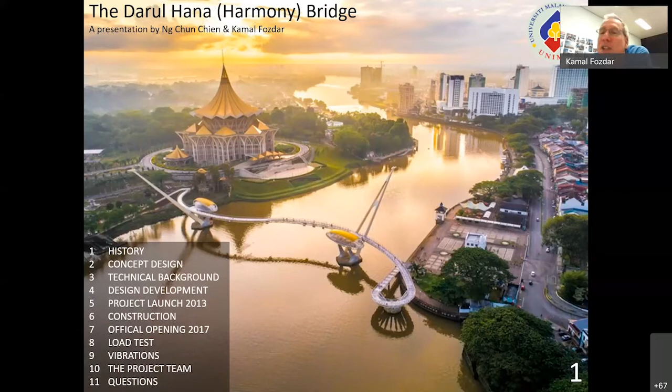Now I'll just go straight on.

I wanted to go through the history of the pedestrian bridge in Kuching, because even before I got involved in the project, Chun Chien pointed out to me there was an initial proposal for a pedestrian bridge near the Riverside Majestic Hotel. This was around the year 2000, part of a Kuching urban master plan study. This was the first pedestrian bridge I'm aware of that was designed for central Kuching.

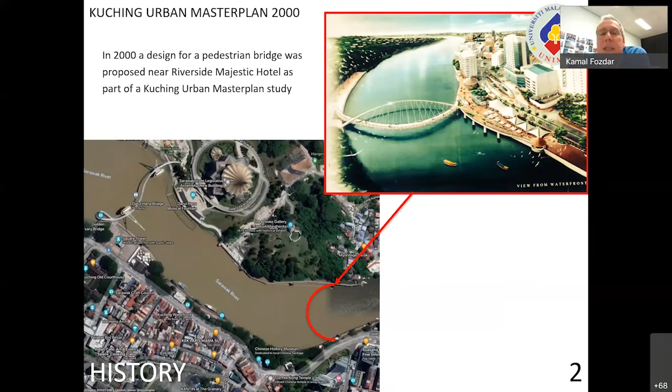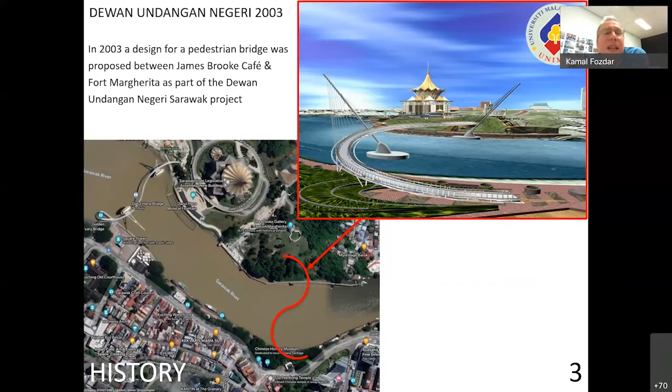This is the first one that we proposed, actually - a pedestrian bridge, an S-shaped, or rather a reverse S, a Z-shaped one, between Fort Margherita and James Brooke Cafe. This was proposed in 2003 when the Dewan Undangan project started. It's a similar size to what we have now, but the location was very different, and the design was a little different too. This is the first one that maybe got the attention of the state leaders - they were very interested because many of them work on one side of the river but live on the other, so they liked the idea of walking across rather than driving all the way around. So this was an earlier proposal.

And this is the one that has been built. The position of the bridge was in the end selected by then Chief Minister Pehin Sri Taib Mahmood - he thought the bridge should be in quite a prominent location. So this location was chosen by him, and the design was related to what we had at the 2003 design, but also quite different. So that's a bit of the history behind the project.

Then, how was the form for the bridge conceived? The first proposal that came along, the very early one, was a C-shaped bridge. Then when it was found it was going to be a bit longer, it became an S-shaped bridge. And there are different ways of doing an S-shaped bridge. So the conversation that I had with Chun Chien is there - just got in, Chun Chien, I've been talking too much, I just went through the history of the bridge a little. Do you want to speak about how the form was conceived?

Sure. So where are we now? We are at the second stage, the concept design. I've just gone through the history of the urban master plan, the Dewan Undangan bridge, and then the Darul Hana bridge, and how the form was conceived.

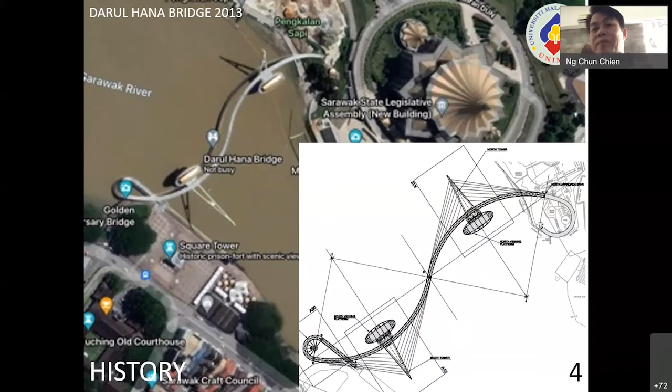The final position of the bridge that we're talking about here was introduced after a competition whereby a viewing platform is introduced. If you notice here, there's no platform in this sketch yet. And the final one has an oval-shaped platform. That's when we changed the monopole support for the bridge to a reverse V - we have two anchor points down there into the river so that it is supporting that platform. So that's how this final form turned into what it is today.

One thing I wanted to mention is that people often feel architects and engineers are on opposite sides of the discussion. Actually, right from the start, the discussions I had with Chun Chien, we were encouraging each other to be quite daring, you can say. I remember a discussion I had with Chun Chien, and he said to me, what do I suggest to make this design more interesting?

So I said, look, there's two options for how we lean the supports, the two piers from which we hang the bridge - we can lean it inside the curve or outside the curve. Inside the curve would be on this side here - if it's inside the curve, it's very stable, good for engineers. If it's outside the curve, it's very dramatic and maybe more exciting. So Chun Chien's immediate response was, let's be dramatic. And that's actually what decided the form of this bridge - we thought, let's go for a dramatic design and make sure it's still stable and works okay. Then, if I remember right, we said, oh, if we slope it outwards, it looks like the wings of a bird. And then Chun Chien did this sketch at the top here, which you can see.

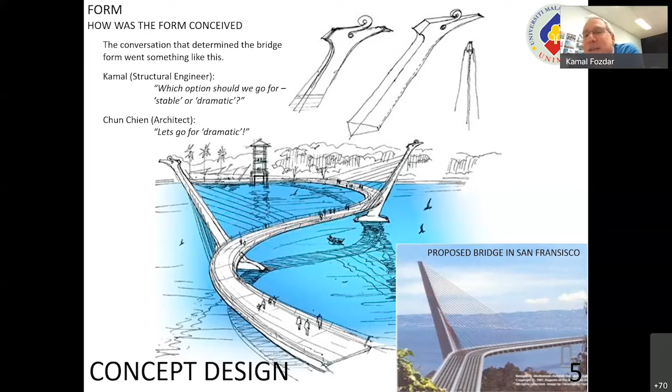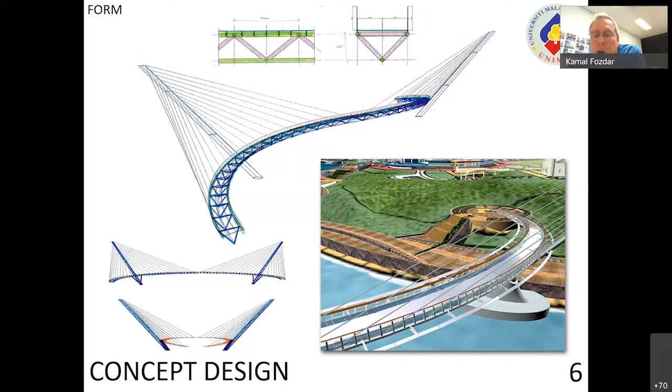I'll go on to the next slide. So this is the form that was initially designed, before we added the viewing platforms. But you can already see the triangular truss that the walkway is on - that's a cross section and a longitudinal section. The form is already starting to take shape. This was maybe 2003, 2004. And then the whole idea of symbolism.

I think Chun Chien, you better explain about this one. All right, okay.

The symbol of this bridge, we call it Yin Yang, mainly is the connection between City North and City South, making the bridge a symbol of harmony for the people of Kuching City North and City South. Symbolically, it is a link between the historic part of the city, City South, and the administrative center of City North, with the purpose of unifying and harmonizing the residents of Kuching city. The bridge links the northern civic area - the DUN building, Wisma Bapa Malaysia, and the surrounding park - toward the city south, linking the mosque, the courthouse, the Sarawak Museum, and the Reservoir Park. So these are all a whole series of civic spaces linked by this so-called Harmony Bridge.

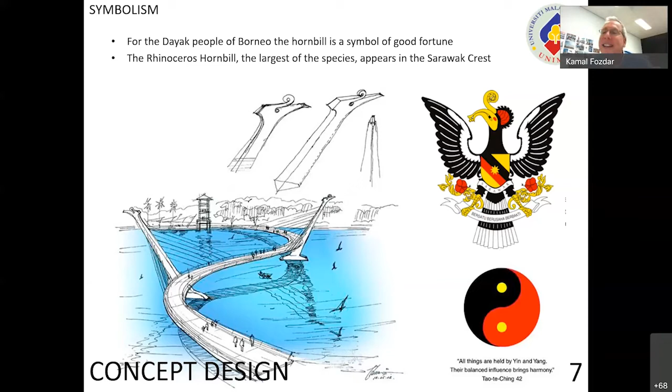The other thing was the hornbill, which is the symbol of good fortune. My understanding is in Sarawak, if you see a hornbill flying in the sky in front of you, you think, oh, it's my lucky day. So we put two hornbills in the middle of Kuching. We hope this brings good fortune and prosperity to Sarawak. So that's part of the symbolism.

And the next one here was about Chun Chien. Do you want to speak on this one or how? You go ahead. Okay, no, it's, when we were introducing this design, the design is very much about finding balance and harmony.

Because you've got two towers which pull the bridge in opposite directions, the only way to get this bridge to work is you have to balance all the forces. Only by balancing the forces resulting from the towers leaning in opposite directions can you find a structure which is in harmony and which will stand up. If it's not balanced, it just won't work. So we spent quite a few weeks, months really, trying to find the perfect shape for this bridge. The curvature had to be exactly a certain curve. The angle of the tower, about 45 degrees, had to be exactly at a certain angle for all the forces to balance off and get the cables in the correct place.

As we were doing all of this, we said it's the same process that the leaders of society have to go through to find balance within society. You've got different races, different faiths, all sorts of different groups of people in society. You have to find balance between all these ethnic groups, the religions, etc. Once you find the balance, you find you have a harmonious society. So it's where wise leaders have brought balance and harmony to people of diverse races and cultures and enabled them to pull together to form a dynamic and prosperous society. This was in the initial proposal which we sent to the state government, if I remember right. And I think it's a bit of a reflection of the growth of Sarawak.

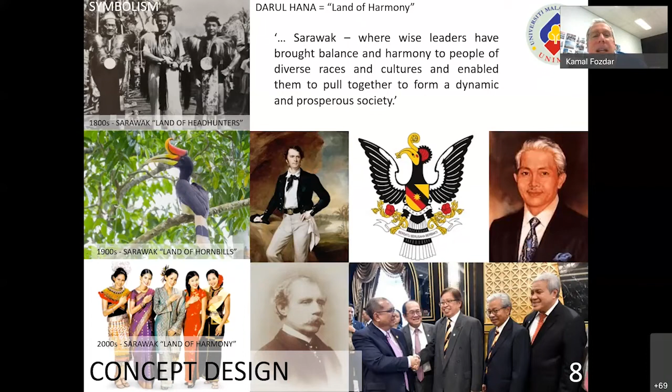That's what we were thinking. So then I thought we'd go on to some technical background. It's about 335 meters long. The height of the tower is about 50 meters. The width of the walkway is about 3.25 meters.

The client, who was the developer for this, was the Government of Sarawak through the implementing agency SEDC, Sarawak Economic Development Corporation. Turnkey contractor was PPES Naim. Principal designer, Chun Chien - you can see him over there - and me. Civil and structural engineers and mechanical electrical engineers were KTA Sarawak, a local engineering firm. Quantity surveyors, PUBM. Lighting consultant, Philips, and the main bridge subcontractor was SediaBena.

So very much it's a local team. It's not that this was a design that came in from Switzerland and was built by some Germans or something like that. This was designed by Kuching boys and constructed by Sarawak boys, I should say.

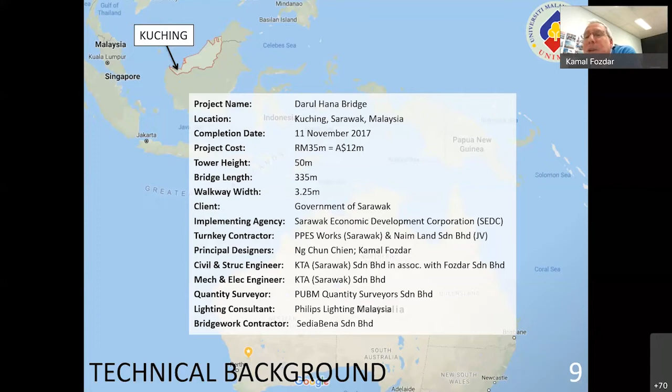So where do the skills for this come from, the skills which are required to design a project like this? Chun Chien and I were both involved in the Dewan Undangan project, which is right next to the bridge, basically, and that gave us familiarity with curved structural forms.

I was working in New Delhi on the Lotus Temple there, the Bahá'í Lotus Temple, and that's, until now, one of the most remarkable structures - the geometry is very, very complicated. It's more complicated than Dun and even our bridge, I should say. But if one's very systematic and thinks it through, everything is possible. So this was the familiarity with curved structural forms.

Then with the actual bridge shape - we were actually asked by SEDC to design a footbridge in Santubong Jungle Trek, near Damai Resort. This is the bridge we designed there. It's a 75-meter long cable-stayed bridge, and it's very much a quarter-scale model of the Darul Hana bridge. The width of the walkway is about a quarter, the span is about a quarter. In many ways, it's just a small scale model of the Darul Hana bridge.

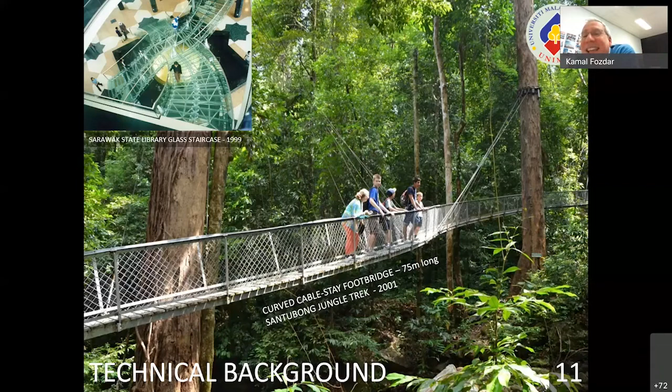And maybe it was this bridge and the glass staircase - if you look on the top left of the screen, you'll see a picture of the Sarawak State Library glass staircase, which is also a triangular steel tube truss structure, the same as the Darul Hana bridge. So basically the ideas from the staircase and this walkway at the Santubong Jungle Trek, we took and introduced into a more prominent location, I should say. So that's a bit of the technical background.

This is a comparison with some other bridges of a similar idea. The Langkawi one - I think Chun Chien, you were familiar with the Langkawi one before - yeah, right, and it's in West Malaysia. The other three: the two on the left are in Europe, the top one in Germany. The one at the top right is Langkawi, at the bottom right is in the States. So it's not as if this is the first S-shaped or C-shaped bridge built in the world.

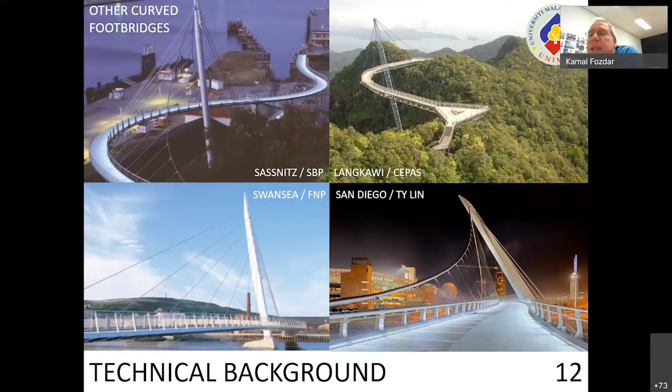But it's the first one where the tower is on the outside of the curve, sloping outwards. If you see the one at the bottom right, it's on the outside of the curve but sloping inwards, which, if you ask me, is the wrong direction - but we won't argue with the Americans, I think. I'll go on to the top left, the Sassnitz one. Actually, the engineers for that one assisted us - they were a sub-consultant to the bridge subcontractor SediaBena, and they approached SBP to assist with the construction engineering on the Darul Hana bridge. And so then we come to the geometry.

The geometry basically is we went for circular curves, in plan and in elevation, and we went for, if I remember right, Chun Chien, the slope was 1 in 12, I think, which was the maximum slope for the bridge, for disabled access.

If one wants to allow wheelchair access to the bridge, one can't have it very steep, so 1 in 12 is just about okay. The other thing it enabled us to do is have 12-meter clearance in the middle of the river to allow ships and boats underneath. Because the walking length was a bit longer with the 1 in 12 slope, by the time we got to the middle of the river, we had the required clearance for ships to go under.

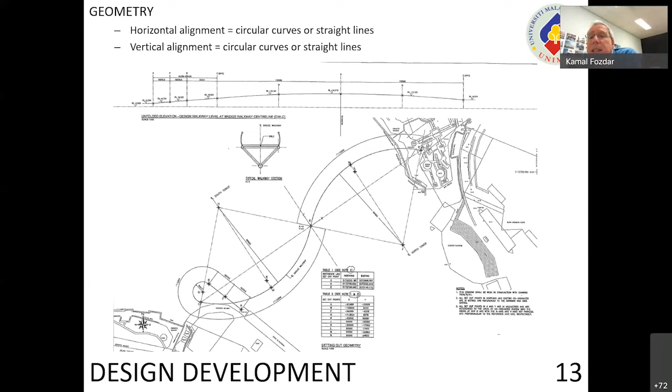So that was the geometry, part of the design development. Once you have the concept and the client has expressed interest in the design concept, you have to go into details. The next step was to freeze the geometry, so this was freezing the geometry.

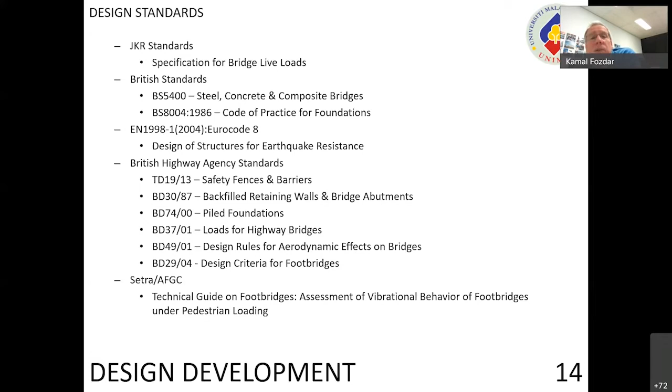Then on the engineering side, we had to decide what design standards we would design to. Mainly we decided to go with British standards and bridge loads from the UK, and there were some European codes for bridge vibrations and for earthquake. So these were the design standards we decided to use on the technical side, and the loads we designed the bridge for.

I think mainly it was British loads. For vessel impact, it was American. For earthquake, it was Indonesian. So we just chose what we felt was most appropriate for designing in Kuching.

I think most of these have been used for other bridges, like our associates KTA. They have a lot of experience designing bridges in Sarawak, whether pedestrian or vehicle bridges. Many of the very large bridges in Sarawak, KTA have been very involved in. So for them, this design process was very familiar.

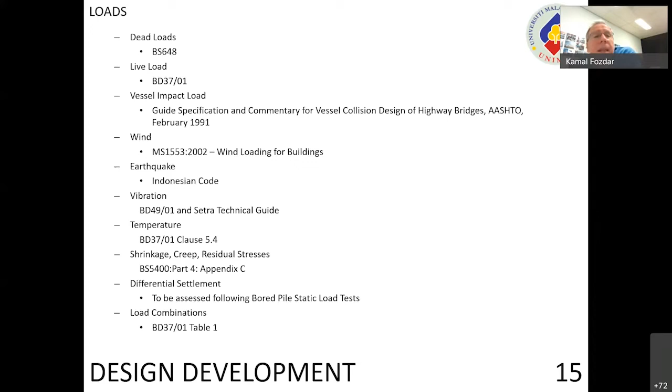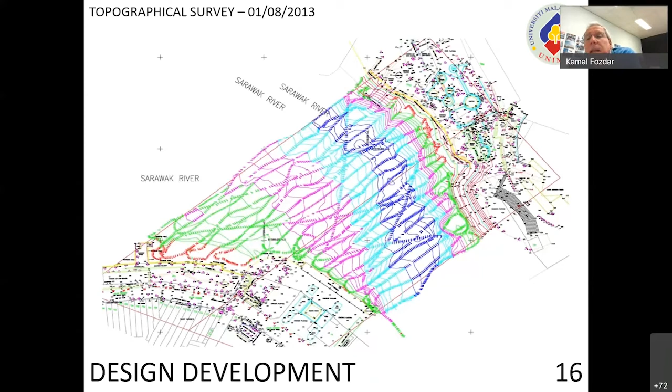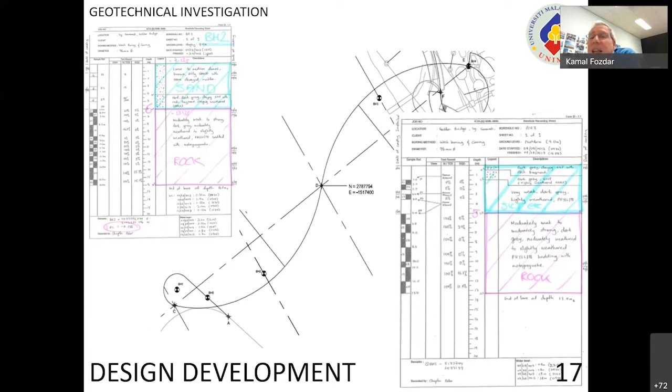After that, one tends to go for geotechnical investigation, because we have to support the bridge which hangs from towers. The towers are supported on piers which go down into the ground, so we have to know what is at the bottom of the river. There's sand and clay, and below the sand and clay there's rock. This geotechnical investigation identified very clearly that you have some very weak clay underneath the river, which we could not use for foundations, but underneath that we have some good rock, and that's what the bridge is founded on.

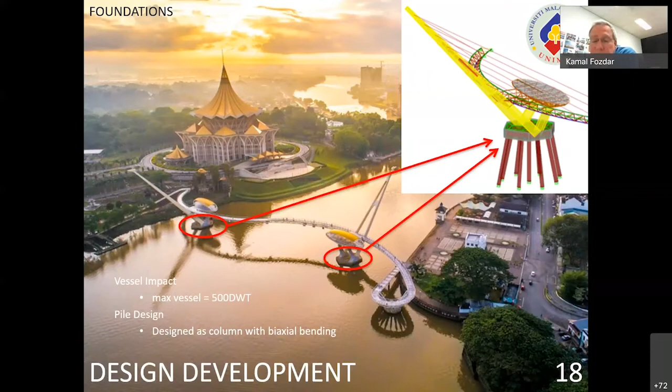And then we went for the towers. Chun Chien, actually your design for the towers was better than the one I suggested - maybe you should explain a little bit.

As I mentioned earlier, the platform came into the picture only after the competition. So in order to support the platform, we introduced a V-shaped tower where there are two supports at the bottom of the pier, supporting two sides of the oval-shaped platform. With that, the pier becomes more stable, and it also gives the tower a more stable shape to support the whole suspension bridge.

This change that was made by Chun Chien - I mentioned to him yesterday, he introduced this change for architectural reasons, but actually from an engineering point of view, he did me a great favor. After he introduced that egg-shaped oval platform on the opposite side of the tower from the walkway, it made the whole design much more balanced. The first design we just had a single tower; now it's a V-shaped tower, the upside-down V, which was much more stable. So I should say thank you very much, Chun Chien.

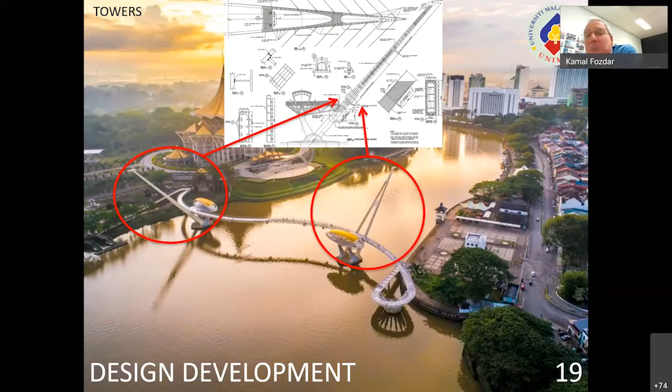So this was the design of the towers. The walkway itself was about 3.25 meters wide, and you can see it's S-shaped here. I guess you could say that S stands for Sarawak also. It's basically a triangular truss, and you can see the cross section here.

The perspective here was taken from our computer analysis. What we found, if I remember right, is that the top part of the truss goes into compression, and the bottom member, shown in blue, goes into tension. It's because of the curvature of the bridge that you get different forces in the top of the truss. It's quite unusual, and the whole design of the bridge is very unusual, but fortunately very stable also, so it worked very much in our favor.

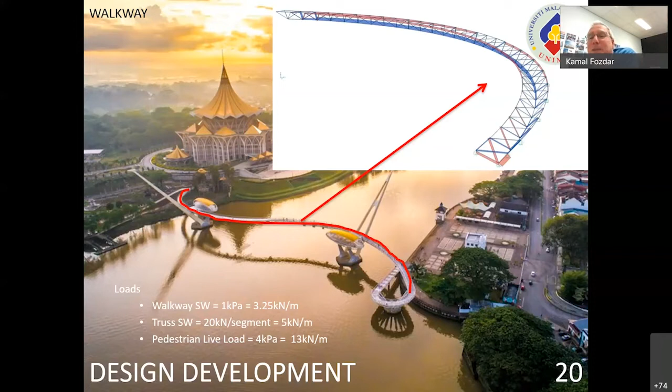So this was the walkway of the bridge, and then again, this was the viewing platform. Chun Chien, you better say something because you're the one who introduced this one.

In the competition, the brief called for a viewing platform, a tea house, and a possible commercial area along the bridge. It was supposed to be a capsule, a glass capsule, where you could air-con the whole thing and have a tea house in there. But because of the budget and so on, we reduced it to just a viewing platform at the moment. Maybe in future we could introduce something more there for the public and for the tourists. But it works very well, I think.

Often when I'm walking over the bridge, I find there are many people on this platform just enjoying the view, because you get a nice breeze there, and it's one of the nicest views in Kuching, I think, really.

Actually, the position of the viewing platform on the left here faces the Dun, so you get a wonderful view of the Dun there, and the one on the right gives you a wonderful view of the Astana. So just by the position of the two viewing platforms, you get beautiful views of the Dun and the Astana, and it's a good place for taking pictures for Instagram and all that sort of thing.

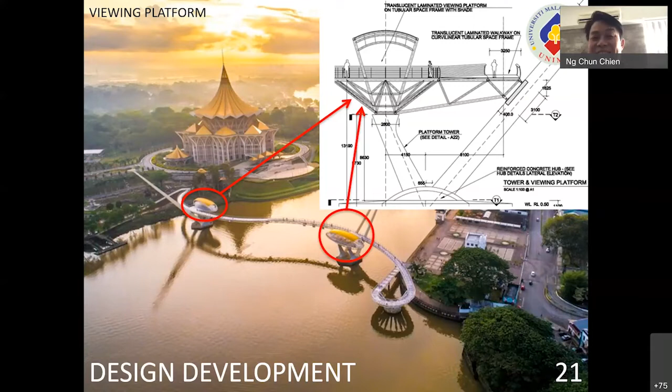What really helped us is Chun Chien's platform on the left here - it made everything balanced. Until then we were struggling a little bit, but after he introduced his platform, thank you very much, Chun Chien. That's a counterweight, yeah - it's absolutely a counterweight, and I was so grateful that Chun Chien introduced this one. So this is the idea of finding balance between structural forces and between professional disciplines, I should say.

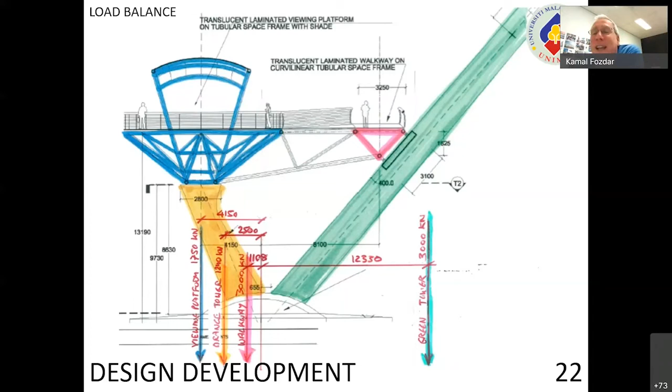So after we found the balance by hand analysis, that analysis was going back to first principles. Then we put it into the computer, and this was the computer model.

We used a program called SAP2000. It's a very powerful program from the States. For bridges like this, it's probably the best software you can get. Our office in Kuching is very, very familiar with it, and our associate engineers KTA have been using it for many years also.

So the analysis of this bridge to a certain extent was maybe the easy part. We put lots of different load cases inside, and we found out what the worst case loads were, etc. Everything worked, so we had the confidence to freeze the design.

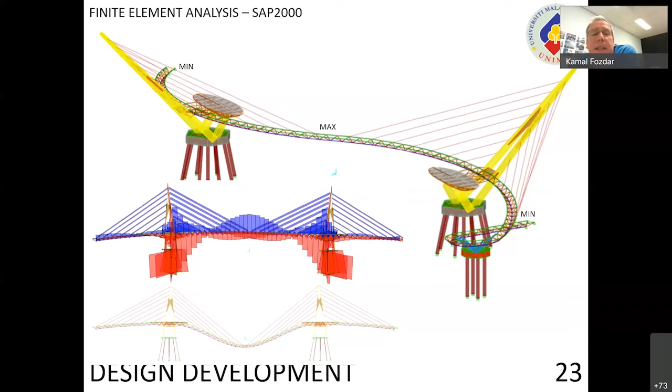As part of it, we had to decide what cables we wanted to use. For a cable stayed bridge like this, there are different companies which produce the cables - VSL, and others from France, Switzerland, and Germany. We decided to go for the Pfeifer-Galfan cables. One reason is that they're very simple and easy to install. The other thing is they're actually very cost effective - the cheapest option, which of course is very attractive to everybody.

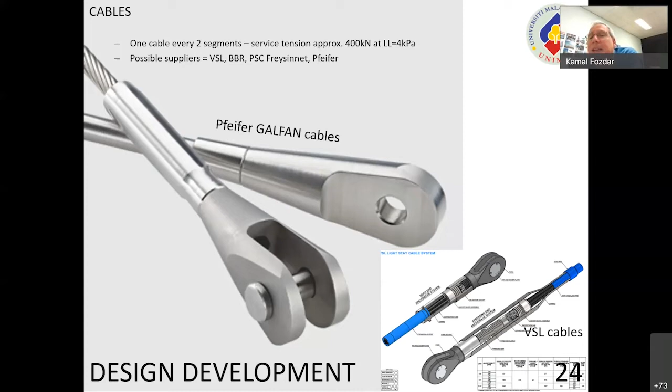But we looked at everything - VSL, BBR, PSC, Freyssinet - all very, very good cables, maybe a little more expensive, no great advantages maybe. And so in the initial design, Chun Chien, there was an idea to have a glass walkway, no?

Yeah, that's why it was called the Golden Bridge in the very beginning, with the light penetrating through the glass surface, the golden color light. It's like a golden belt that spans across the river with an ethnic pattern on top.

But in the end, we did not go ahead with it, for practical reasons also, considering there could be people with height phobia who have problems getting through it. So in the end, we changed it to a solid platform.

The idea was that it would be lit from below, so it would glow like a lantern as you walked over it - translucent glass, not transparent glass. But there are many glass bridges in China, and they've had many problems with them. So I think it was a wise choice to be a bit prudent and not take risks on this one, which is a link between the two sides of the river. It's not a tourist attraction on a mountain somewhere - it's in the middle of the city.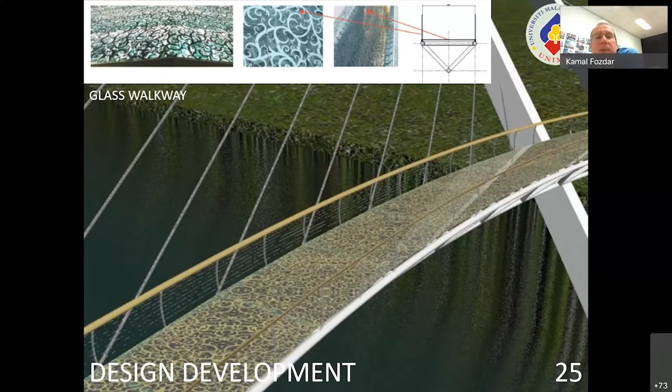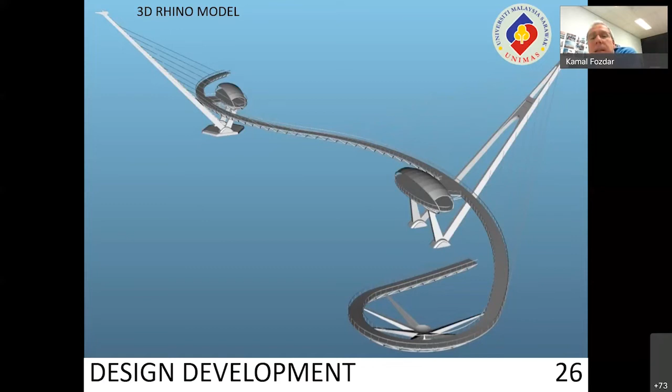So this was the initial proposal for this one. Then we built up a 3D model in software called Rhino, which as architects you're probably quite familiar with. This is the 3D model that we have - it's got all of the elements basically. And we printed it out using some 3D printers, these MakerBot replicators.

We had to build it in stages because the printer can't print the whole thing in one go. So we'd print one section and then glue everything together. This is the 3D model that was built to make sure we understood everything and the topography.

And also to show it to the client and the contractors so that they understood what the project really was. Otherwise, it's very difficult to understand.

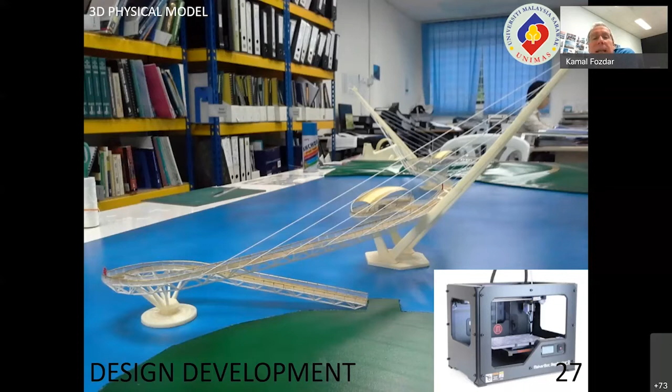So then the project launch was in 2013, already 8 years ago - how time flies. And Chun Chien, this was submitted to the State Planning Authority, which is the usual procedure. Yes, we submitted this one to the State Planning Authority.

And then, after the competition was done and it was announced that this bridge would be the winner, that's what we did - then we did the launching.

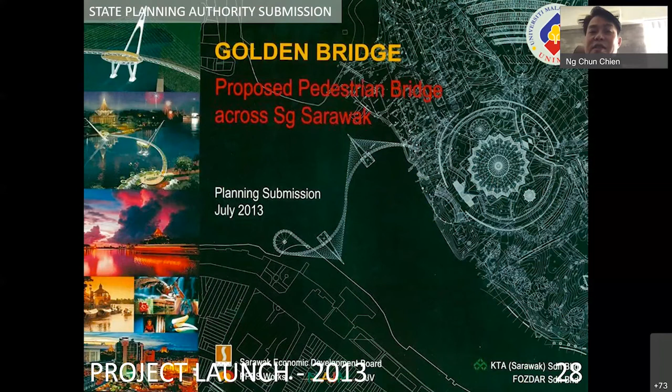Right, and then we had to go into buildability. We had to find a way to - we're running out of time, so I'm going to talk a bit fast - this is the construction sequence.

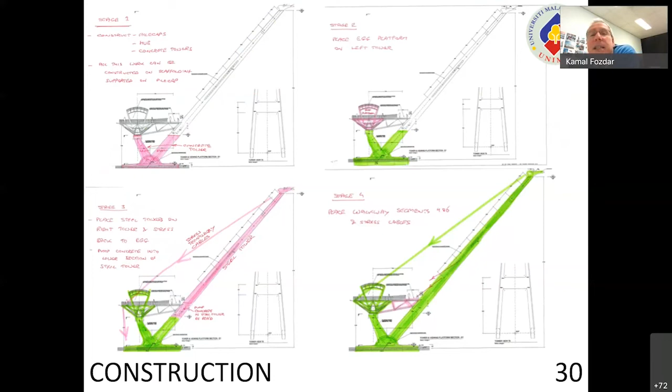We had to discuss with the contractors different ways. So these are 4 stages, and then 5, 6, 7 here - you know how to build something like this. And again, the main bridge subcontractor Sidiabina engaged the German engineers.

Schlaich Bergermann also gave a hand in the construction sequence of the bridge.

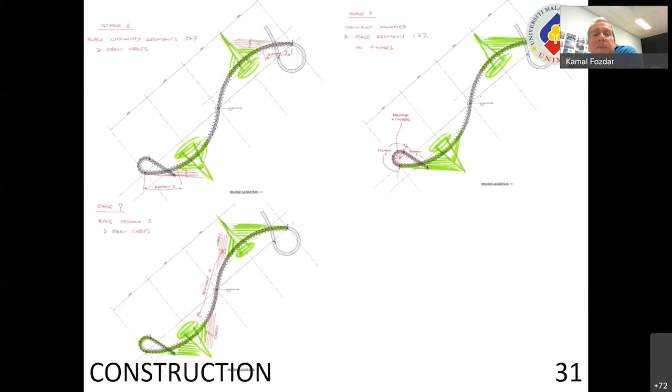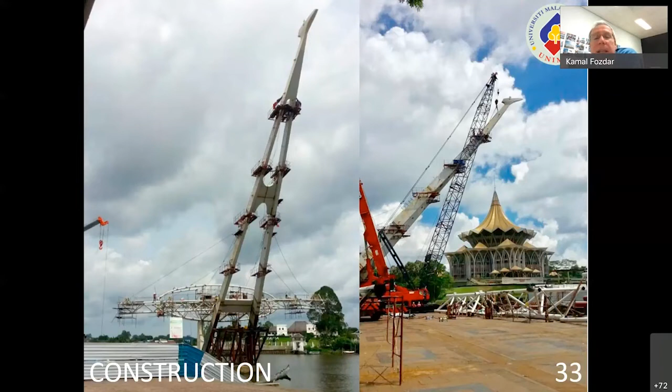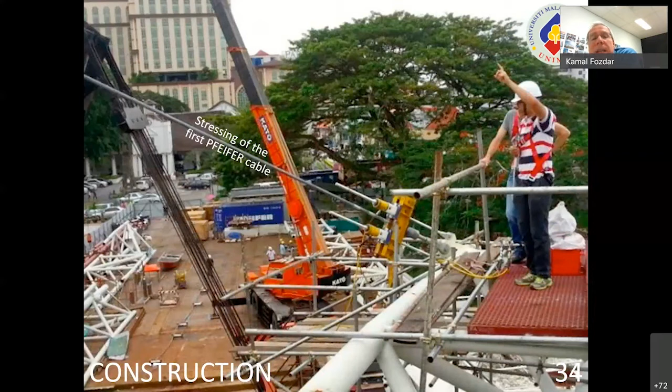By 2017, things got very serious. This is when the tower was pretty much up. I think this picture on the right is when the last section of the tower with the hornbill was lifted up. In the picture on the left, the steel cables are starting to go in, meaning they're starting to lift the walkway up also. This was the stressing of the first of the Pfeifer cables.

Also sometime in 2017, it was very nice to see the cables going in, because this was the start of the complicated part of the construction. This was May of 2017, if I remember right.

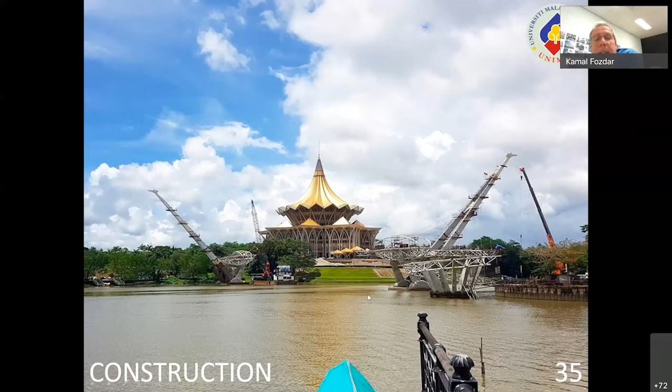At the beginning of May, you can see the central section of the bridge is missing - this part here hasn't been lifted up yet. Within a few weeks, I think 2 or 3 weeks, everything was done. You can see it's almost linked up in the middle, with just one little gap there.

One day at the end of May 2017, we lifted up the final bridge segment. You can see it being dropped in place. At the top of the slide, that's me shaking hands with the engineer from PPES, Ajeng, who was there also just to celebrate the closing of the bridge.

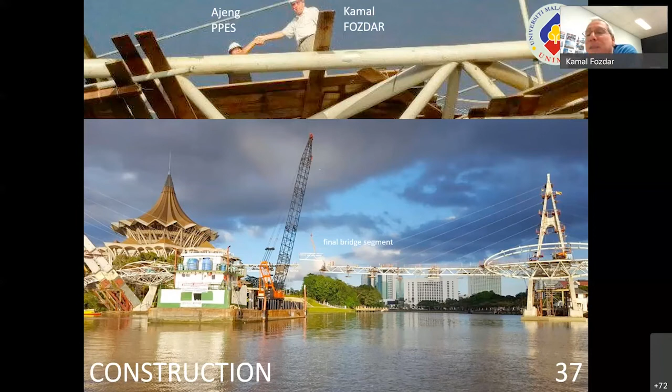Once the bridge was closed at the middle span, the whole structure becomes stable. Until then, it's all a little unstable. So we were all very happy.

Again, as I said earlier, this is a Sarawak project. All of the boys in this picture are from Sarawak - there's me, one Orang Ulu and two Ibans in this picture. So it's local produce. This was the celebration in November of 2017.

Biggest firework display I've seen in my life. It was a very wonderful occasion. The month after the opening ceremony, there was the regatta where the Sultan of Brunei was invited down, and all the VIPs had their boats there. You can see the crowds on the bridge.

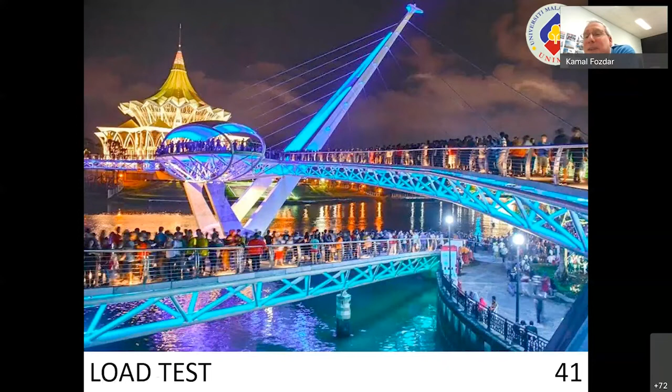The name for the slide I wrote at the bottom was load test, because you can see there are hundreds of people standing on the bridge. It was a good load test for the bridge. We designed it for 5 people standing on every meter squared of the bridge, and I think not far off that in this picture - it's absolute shoulder to shoulder crowds there.

Everything went fine. One thing which didn't go so fine was the vibration. There was a little bit of sway at the beginning, if you remember. As I say to people, one can calculate things, but the proof is in the pudding, and sometimes the movement is a bit more than expected.

So at the beginning, because the movement was a bit more than expected, these tuned mass dampers were installed - like this picture on the bottom right. There are just a few of these underneath the walkway, and no one ever notices them. As soon as there's a bit of a sway or wobble in the bridge, these tuned mass dampers can remove the wobble, and that seems to have been very, very effective.

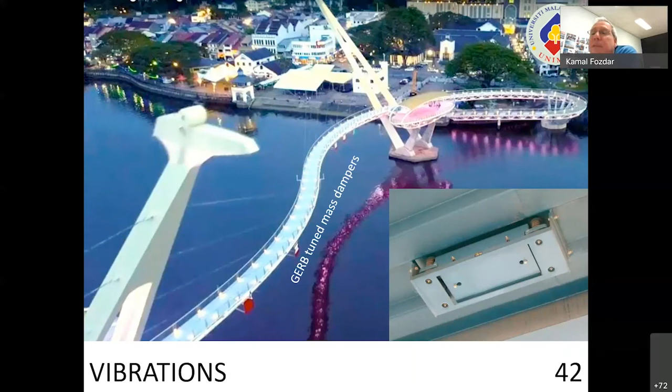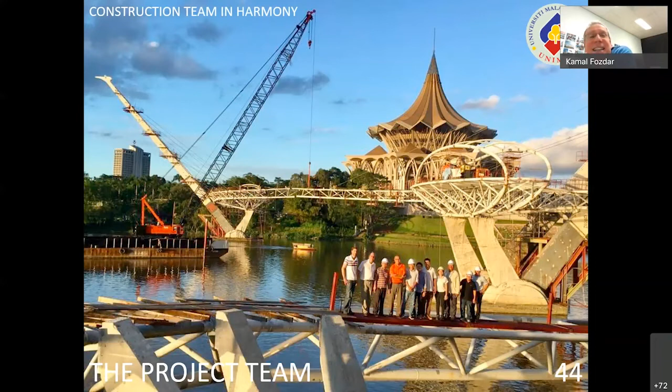Then we have the construction team in harmony, same situation, multi-ethnic, multicultural group, local boys, all building a very outstanding project. And then we have consultants and contractors working together in harmony. And very pleased to say, architects and engineers, Chun Chien, it's been a pleasure working with you. It was a great honor, I should say.

One thing I'd like to say is that it's only through a conscious effort to find balance and harmony that we can develop the team spirit within any project and produce the best results in quality, cost, and speed. It's a result of working together, finding balance within the team, working harmoniously. We can end up with a beautiful project such as this one. That's all I have to say.

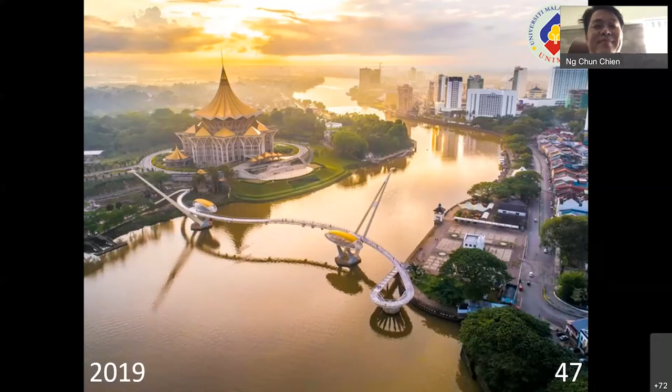Chun Chien, I don't know if you want to add something there. Oh, thank you for this opportunity, guys. I think this is the end result. This is what was produced at the end of the day, and we open for questions now.

I think we've gone a little over. I'm sorry, but not too far, I hope. No problem, no problem. Thank you very much for the fascinating talk. I believe our curious audience may have some questions to ask Mr. Kamal or Architect Chun.

Maybe I'll pose the first question. Okay, sure, go ahead. For the V-shaped concrete, it's such a huge and massive thing, how do you mobilize it? Is it cast on site, or do you mobilize it from somewhere to that location? How do you do that?

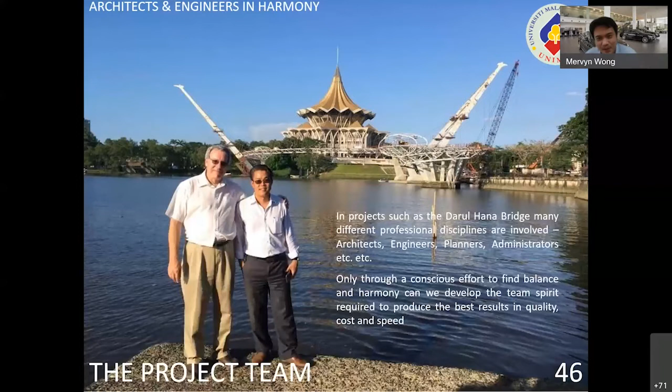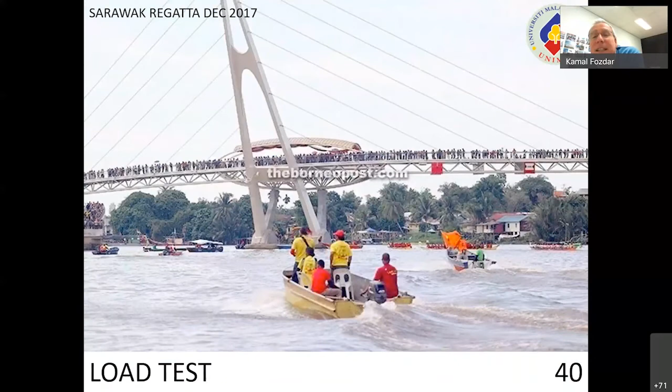Yeah, these V towers. If we go back a few slides here, you can see them being lifted up. Here you can see the tower, the very tall tower, is actually steel. It's a hollow steel box. So you can see here, all of the tower from here downwards is in place. This part from here until the top is being lifted up by this crane. So the tower was lifted up in stages.

I'm not sure if you can see here also, the two towers actually, until the level of the walkway, are concrete. So what's underneath the egg platform, that oval platform in the walkway, is concrete. What's above the walkway level is steel, because it should be a bit lighter and a bit stronger, and it makes it much easier to balance, actually. So we basically choose the materials and the construction methodology. It has to be buildable, it has to be easy to construct, and it has to be balanced, so that it stands up in the end. So that's the process that happened here.

So if we go back here, you can see that—where is that picture? This one here. See, everything underneath here is a concrete tower. This bit that sticks up here, the V, the upside-down V, is actually steel. It's a hollow steel box.

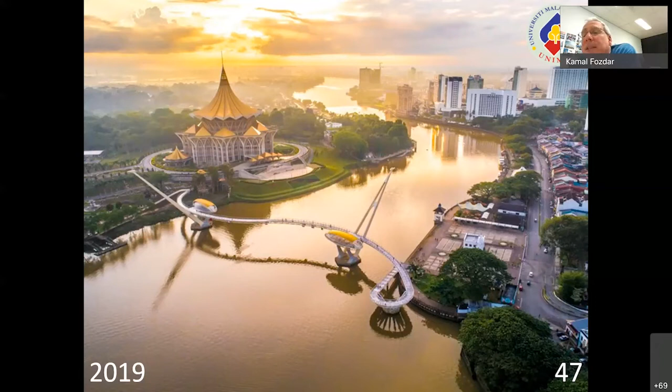Basically, you drive a steel tube, a big steel tube—we probably have a picture of it here. You drive big steel tubes into the soil at the bottom, and then through the top of this steel tube, you can fix the machine for boring the pile. Then it bores down through the middle of this tube, down through the soil into the rock below. But you have to have somebody who has the experience. Fortunately, Sarawak has these people—there are some very good contractors there, and they have all of the equipment.

Okay, I think that explained it. We have two questions in the chat box. One is from Survey Gui: can you share a bit about the aspect of costing, targeted versus actual? And the second question from Chula: how would you know the load test will not fail?

The first one, my understanding, this was between the turnkey contractor and the government. The budget, if I remember right, was 35 million ringgit or so, and it was within that budget.

We always complain that projects go over budget, over time and everything. My understanding is both the Dewan Undangan project that Chun Chien and I were involved in, and this project, were more or less on time and on budget. So we are very proud to be associated with this.